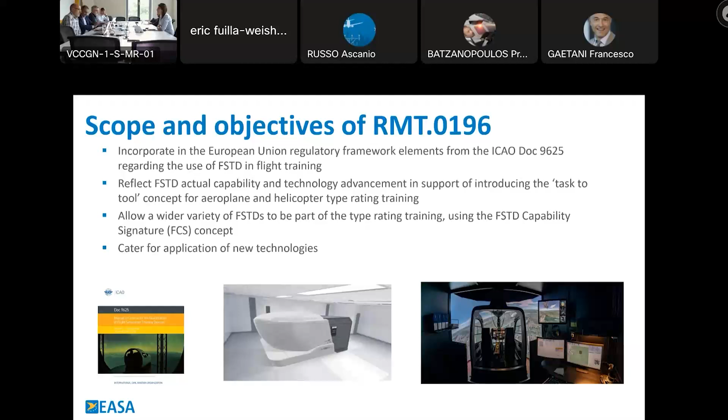Thank you, Francesco. As Francesco said, this task is really an omnicomprehensive task, and is not only looking at the FSTD capability, it's also looking at what the benefits are in pilot training using the FCS concept and framework. To do that, we had to thoroughly review the type rating training course, which is the very first training that the FCS concept will cover, and also see how much we can use FSTDs other than FFS. It has been a very long journey, and we had to review also the qualification of FSTDs with the new CS-FSTD concept that the colleagues will explain very soon. And then we had also to amend the authority as well as the organisational requirements, introducing also tips on how to move forward in that direction.

As we said, today the focus is on the CS-FSTD, and one of the differences that you will spot immediately is that the new CS-FSTD will cover both aircraft categories, fixed wing and rotary wing. Today we have a CS dedicated to aeroplanes and a CS dedicated to helicopters. Tomorrow we will have one single CS with one single concept. To better explain this, I will give the floor immediately to our colleagues, Colin and Eric, please.

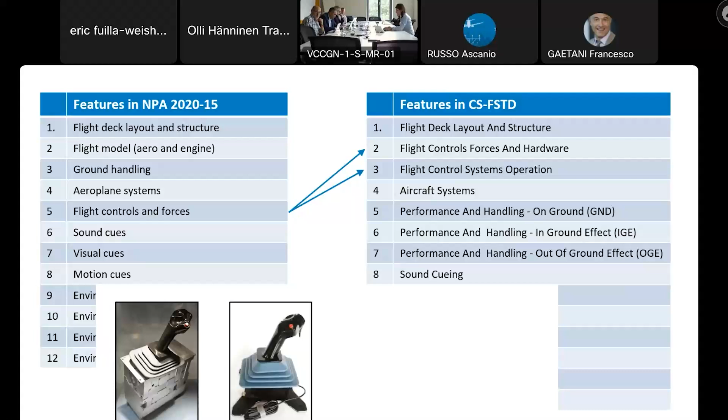Feature number 2 is all about the primary flight control forces and hardware. Please consider a fly-by-wire aircraft such as an Airbus. On the highest, the specific level, the used hardware could be, for example, a genuine Airbus side stick, as you see in the image. For this highest level, the flight controls should look and feel as in the aircraft, and the forces needed to move them should be very realistic. For the representative level, the controls should be very similar to the real aircraft, but the forces do not have to be as accurate. So at this level, the side stick could be simulated, and it could be, for example, something like you see in this photo.

For the generic level, the controls should be characteristic to the simulated aircraft group. Perhaps even a simple controller could be used. And it's also possible not to have any flight control hardware at all. Naturally, the training credits for such a device would be very low.

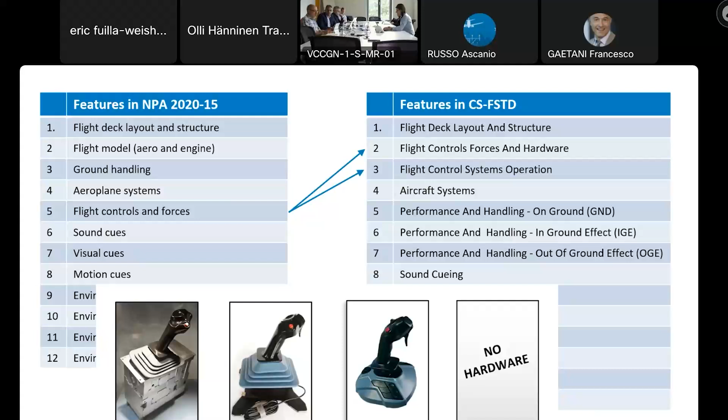Feature number 3 then concerns the flight control system operation, how the flight control system behaves, perhaps what kind of protections it serves, how much the flight control surface deflections move, and so on.

We have also completely reworked the requirements for ground and flight model. In the new CS-FSTD, we talk about flight regimes: ground, in ground effect, and out of ground effect. The ground regime concerns the whole performance and handling, so it combines all the aspects of the ground model and aerodynamics when the aircraft is on the ground. For example, when taxiing, during takeoff, ground run, etc.

And the flight model requirements have been divided into 3 different features. There are reasons to do all of this. First, if you have only one feature for the flight model, as in the NPA, then your flight model covers all the flight phases. It means that you can't get the best level for this feature unless you simulate and validate also takeoffs and landings, but that is very difficult and expensive.

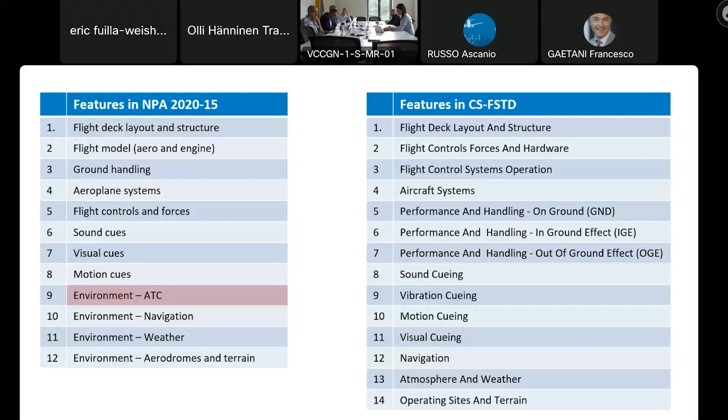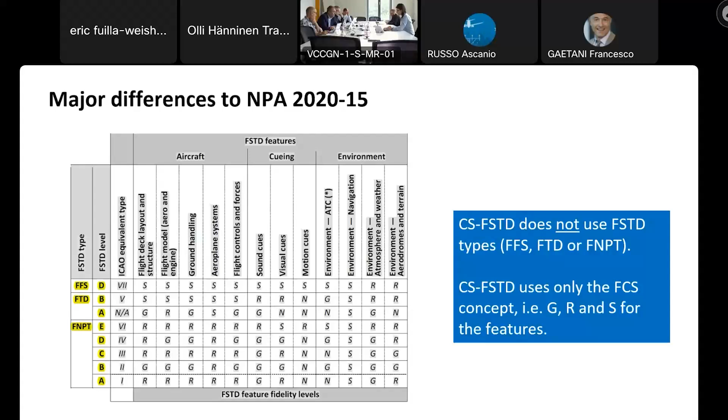Bear in mind that this CS-FSTD will be applicable only to new devices. All the existing devices are remaining in the existing framework. So this is an important change compared to what we are used to and compared to what was in the NPA. Next slide, please, Olli.

There is also an important change that we have made. It is that the fidelity levels for each and every feature now range from generic, representative to specific. We provide a description and we provide requirements for all the fidelity levels, which was not the case in the NPA, which was not the case in DOC 9625. So all the features had their fidelity levels that range from N, G, R, and S. And we think that this makes the whole concept more homogeneous, and there is a clear understanding of the fidelity level and its meaning.

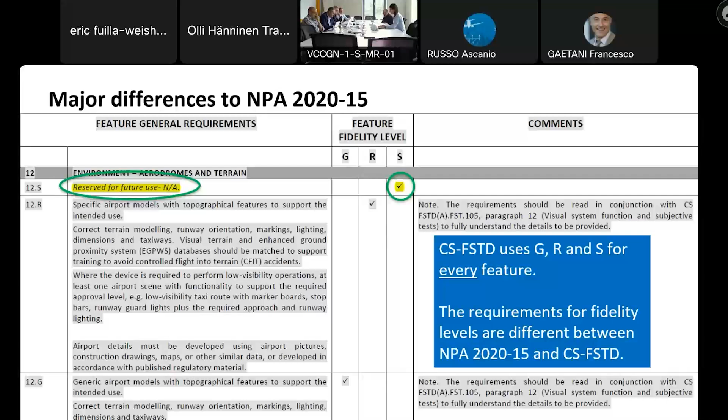There is something important to notice concerning the generic fidelity level. Compared to what is in DOC 9625 and compared to what is in the NPA, the generic fidelity level is slightly higher. It is no longer a simplified simulation. It is no longer a basic simulation. Generic now means it is characteristic of an aircraft class or group. So this is to bear in mind also.

And to make a very simple comparison between the old world and the new world, we can say that if we have all the features at specific level, this is today's FFS level D, roughly. There is no major change. And in fact, if you have a deep analysis of the requirements that we have put in the new CS, you will see that we do not go higher than what you already know for the FFS level D. This is today's limit on the top end.

And if you have a look at what generic means compared to the existing framework, we could say that roughly generic means something that you use in an FNPT.

So this is to give you an explanation about what we understand now with fidelity level. We can say that also the fidelity level for generic is slightly higher than FNPTs because we have seen that in the existing ecosystem of simulators, what is proposed by the industry is higher than the bar that is set by the existing requirements. So we consider that in order to fulfill training needs, we have to align to this and to make generic higher than what was in the previous NPA and Doc 9625.

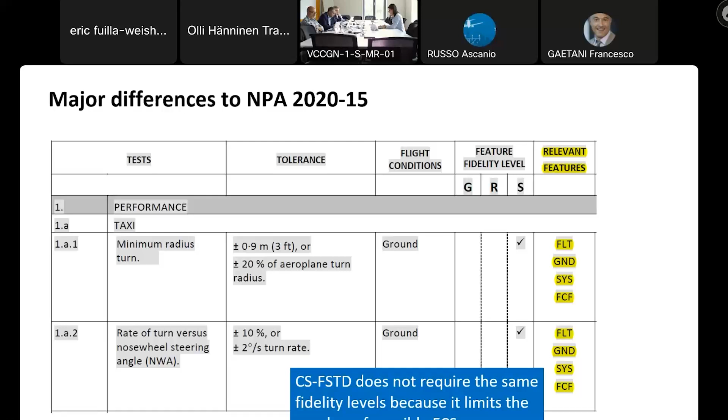As you see, the system presented in the NPA needed a change, and we wanted to have the greatest possible flexibility. So we have rebuilt the whole logic of how the applicable objective tests are selected, and you will see a separate page about that a bit later.

So now let's speak about the change in the scope of the features and the definition of the requirements. In fact, when we took a deep analysis of the content of the document and the comments that we received, we soon realized that there were a few places where there was a kind of overlap between the definition of the requirements and the feature to which they applied. This is just an example.

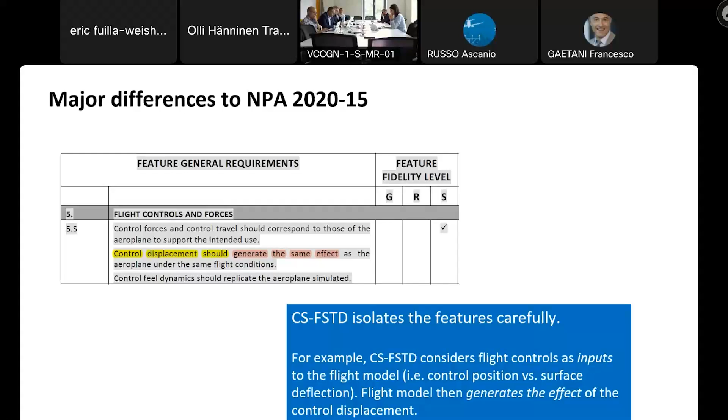And as was mentioned earlier, the airplane and helicopter requirements have been in two different documents. And traditionally, the airplane document has always been updated first, and the helicopter requirements perhaps only some years later. So a decision was made to merge the airplane and rotorcraft requirements into one single CS-FSTD. The layout of the document has been carefully considered so that it would be readable and that the reader would understand what is applicable to airplanes and rotorcraft.

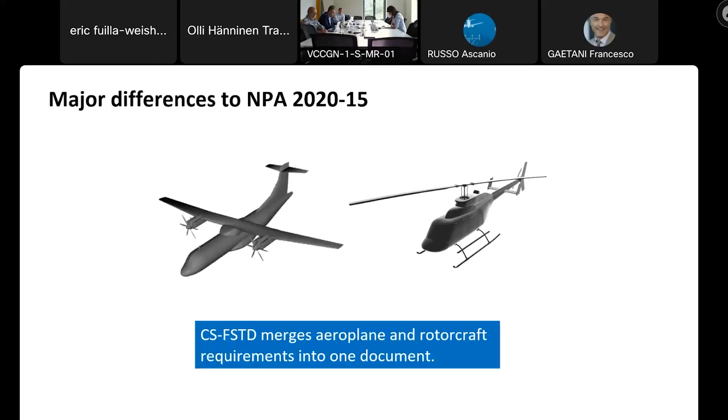And now I'm going to give very basic information, but I think it's almost the most important. In order to guide you in the reading of the document, you have to consider that it's really different from the existing CS-FSTD(A), the existing CS-FSTD(H). It is very different also from Doc 9625. It looks like what you have in the NPA, and we have developed this concept even more. We have a clear split between subparts. There are 5 subparts, and we will describe them in a few minutes.

And each subpart is based on tables and a clear split between requirements, and these requirements are covered by CS, and also covered by guidance material. And we have tried to illustrate all the requirements as much as possible with examples and guidance. And one of our main goals is to have requirements that are indeed requirements and that are not a mix between requirements and guidance. So we have tried to make a right split between the requirement and its guidance.

So now we are going to have a look at the subparts of the document. So I'm going to share my screen. Please bear with me a few seconds.

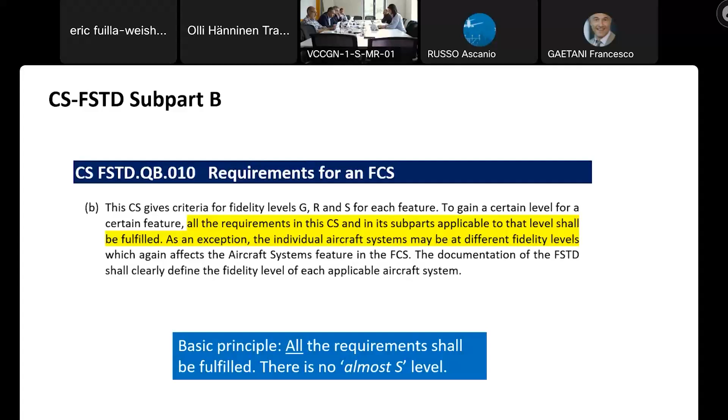The first important principle that I want to highlight is here. The principle is that you have to comply with all the requirements to gain a certain fidelity level. So it means that we don't have an almost level S or a little higher than representative level. It's strictly one of the 4 levels, N, G, R, or S. So you are either at the level none, generic, representative, or specific. There's nothing in between these. So it's an important principle to be included to avoid any wrong interpretations of the requirements.

We said that we have isolated the features. Yes, we have isolated them, the requirements are not overlapping with other features. Still, we can't consider the features in full isolation. The complete training device should have an FCS and levels that make sense. For example, it would be just silly trying to build a device with the specific level of flight model, but the lowest level of flight controls. Actually, also the training requirements kind of mitigate this problem because it would be indeed silly to have such a combination.

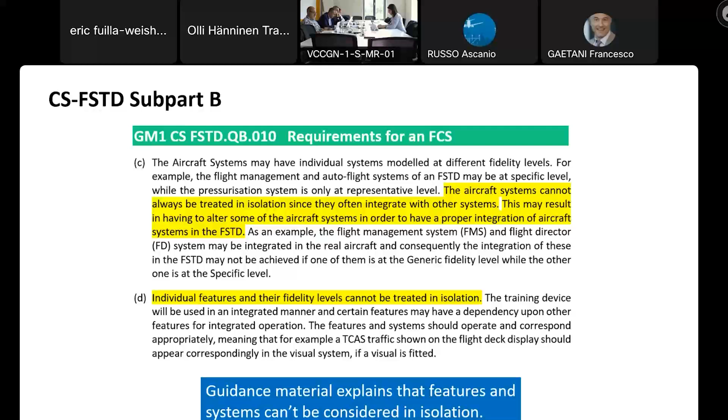As you see here, this framework allows that the aircraft systems may be at different levels. We do this to enable all sorts of part task trainers. You don't need all the aircraft systems. If you are interested in giving training only with some aircraft systems, still, also these systems can't be considered in full isolation because often the aircraft systems integrate with each other. If the device has the aircraft systems at different levels, then the documentation of the device must declare this, and also the training requirements tell you what systems are necessary for the training tasks that you are planning to do.

In the current requirements, the statements of compliance are required only for some topics. Now we are introducing a new concept. We require a statement of justification for all the general requirements. We are deliberately using the word justification. The reason is in the semantics. For the current statement of compliance, you can basically just say that, yes, we do comply. But the statement of justification means that you should give more information to tell how you are fulfilling the requirement.

We understand that these statements will result in more work, but it will serve as an audit trail. It will close the loop. It will create a documentation that tells if and how something is simulated. This tries to answer a very common problem, because it is too often that a device is qualified and only a few years later it is noted that something does not work in the FSTD, and nobody is able to tell if the thing was ever even simulated in the first place. So the statement of justification is given to all the requirements so that you can always refer to them, seeing if and how something is simulated.

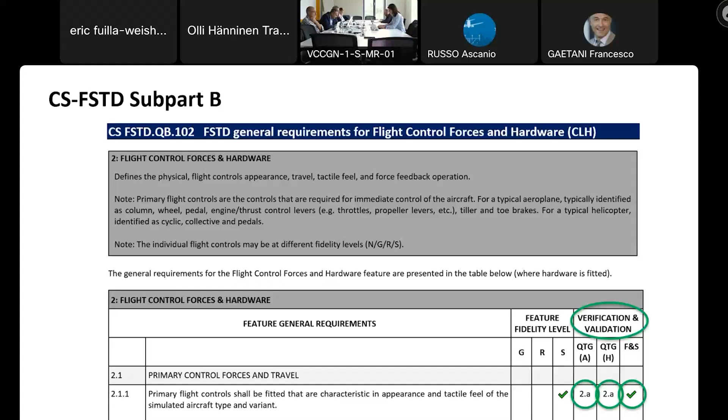We acknowledge that the general requirements are still long and detailed. Therefore, we have summarized them also in easily understandable and very short descriptions for each feature. These words are written to be meaningful, especially to the users of the device, again, meaning the pilots and instructors. They have to understand what each feature and different level means. This is an effective way of sharing that information.

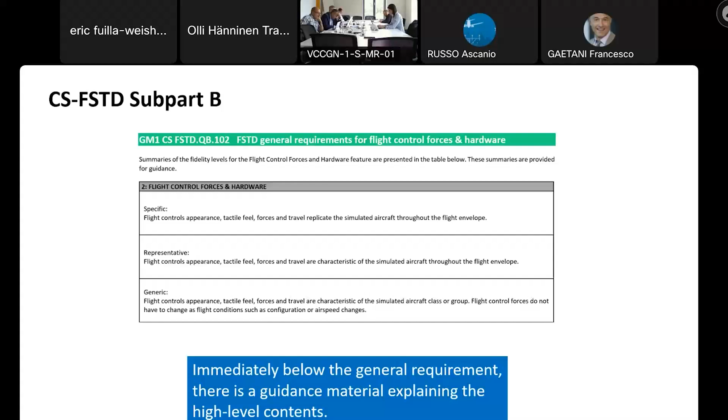We are adding this kind of information as guidance immediately below the general requirements. The same guidance is also added to the training requirements, so that the pilots read more than the CS-FSTD. As you see, we acknowledge that this change is huge, and we are using guidance material in helping all the stakeholders to understand what each requirement and process really means. So this ends the introduction to subpart Bravo. Eric, back to you.

So I will speak now about subpart Charlie. Subpart Charlie is new compared to what was presented in the NPA 2020-15 because we received several comments requiring more explanations on the sources of data that can be used depending on the fidelity level. In fact, we decided to create a brand new subpart. We call it engineering justification.

And indeed, what we speak about is what is known currently as the engineering report, and also the validation data roadmap. And if we are used to the validation data roadmap on higher end devices today and to the engineering report on FNPTs, for instance, from now on with the new CS-FSTD framework, there will be a requirement for both documents, whatever the FCS. There will be an engineering report even at specific fidelity level.

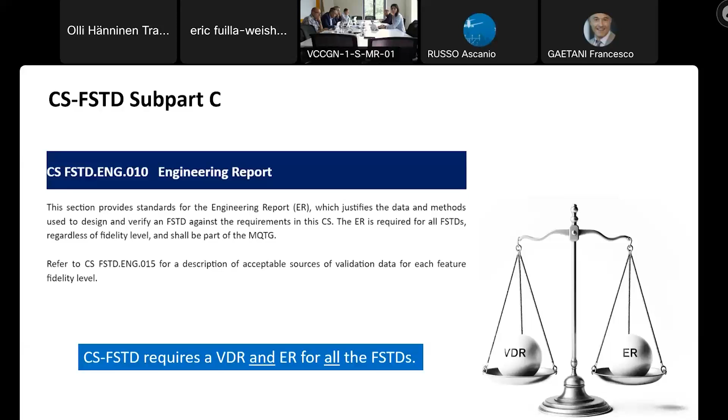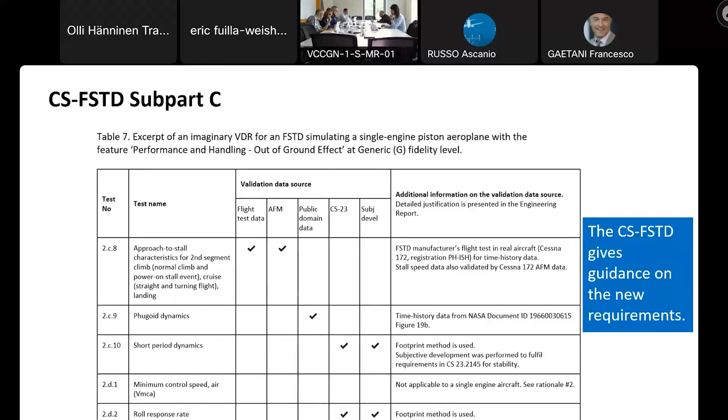I will stop sharing. Thank you, Eric.

And subpart delta gives all the requirements on QTG tests. I will brief you on the main aspects that are necessary to be understood on this entity. As you remember from the beginning, we don't require that the features should be at the same level. While this brings flexibility, it also creates a bit more complexity that has to be controlled and understood. The first aspect is highlighted here. This means that you may have the features at different levels.

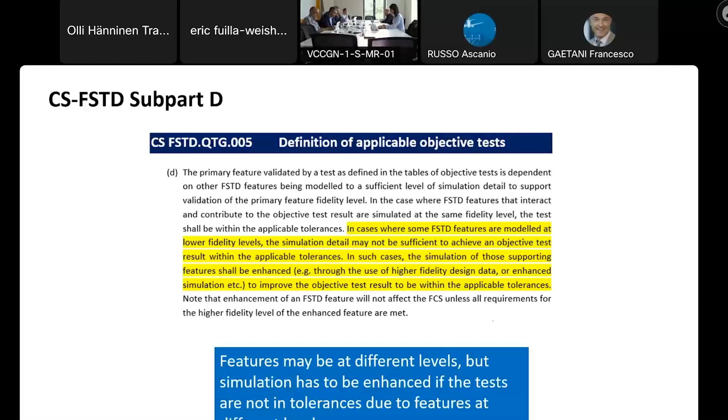When any objective test is applicable to your device, the test shall be within tolerances. We don't give any alleviations to this. For example, if you build your device with only generic level flight control system, but you aim for specific performance and handling, it is a combination that may lead to problems on many objective tests. It is likely that the tests cannot fit within tolerances with such a combination. In such a case, you should just enhance the flight controls simulation as much as is necessary until the tests can be demonstrated to be within the tolerances.

Another important principle is that we are fixing a problem with the objective tests. Today, our regulation gives tolerances on the output, like how the aircraft attitude changes, but the regulations today hardly say any word about the test inputs, how well the flight controls and initial parameters should match the validation data. In this example that you see, it's a good match on the test output. It's nicely within tolerances, but if the input is like this, we should really not approve this test.

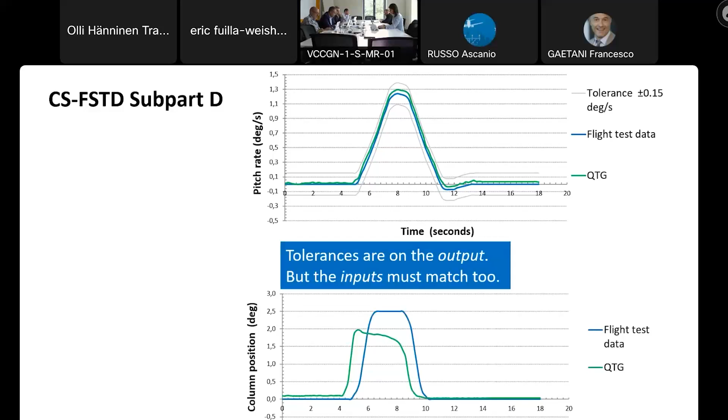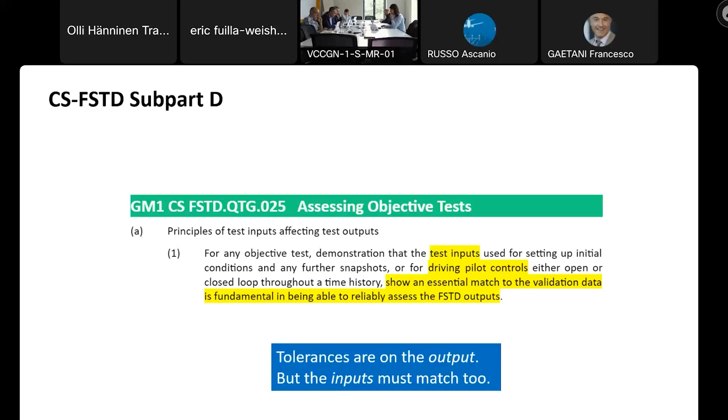As a summary, we need criteria on the test inputs as well, and we have added this into the CS-FSTD. This is part of the new requirements. You see that it uses the words essential match. It means basically that the FSTD result is the same as in the validation data. Please stand by. There will be a further page on the essential match coming soon.

Some sections are common for airplanes and rotorcraft. For example, some visual tests are such. But most of the tests are different between airplanes and helicopters, so we use the letters A and H in the titles, and we also use the complete words for airplane and rotorcraft in the titles as well.

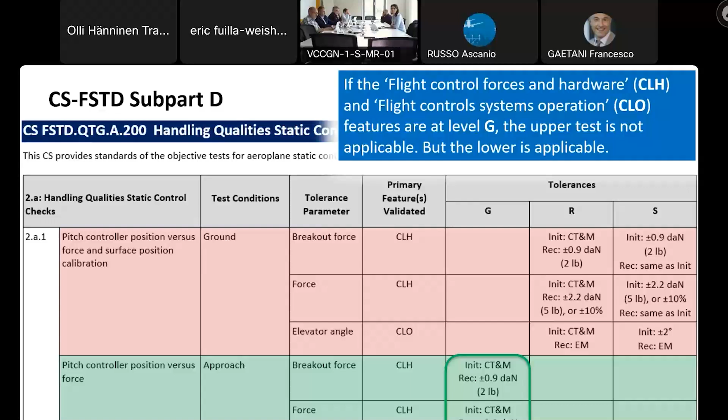This is a good example. We are still reading the same test for a sweep test. For the representative level, for initial qualification, meaning the approval of the master QTG, the elevator angle tolerances are CT and M, meaning correct trend and magnitude. So there should be appropriate validation data to support this test, and the FSTD should correspond to that within correct

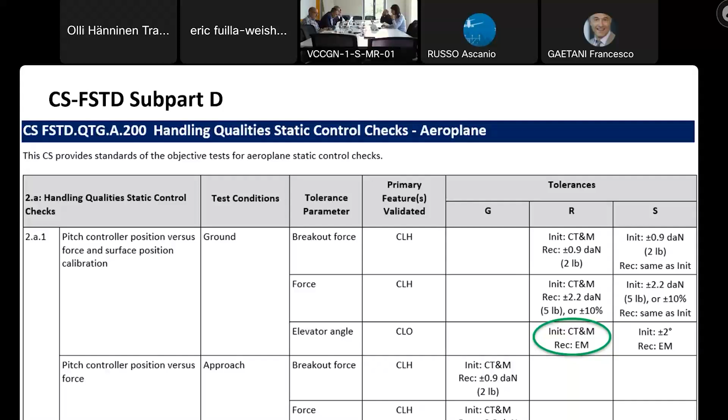trend and magnitude. For the recurrent tests, the annual tests that you perform, the FSTD should show essential match to the master QTG. We abbreviate the essential match as EM, Echo Mike. The elevator angle is calculated by the software based on the control position, so it should basically not change at all, even as time passes by. So an essential match is expected. We give criteria and guidance on the essential match.

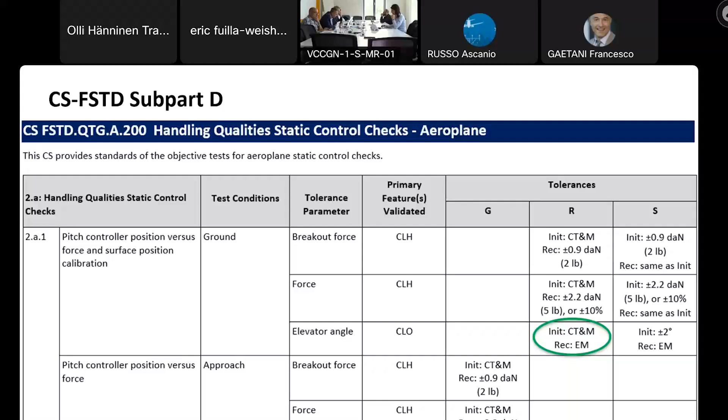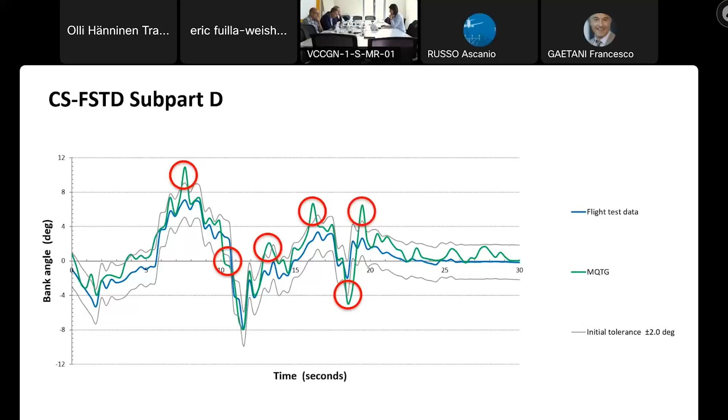But the same question about these highlighted points still arises for every single recurrent test. The test engineer and the evaluator waste their time when they have to also open the master QTG binder to compare the recurrent to the master. For this reason, the CS-FSTD requires that the recurrent QTG test should also show the master QTG result. Many device manufacturers do that already today and have done that for many, many years, but we want to make this a standard for all the devices.

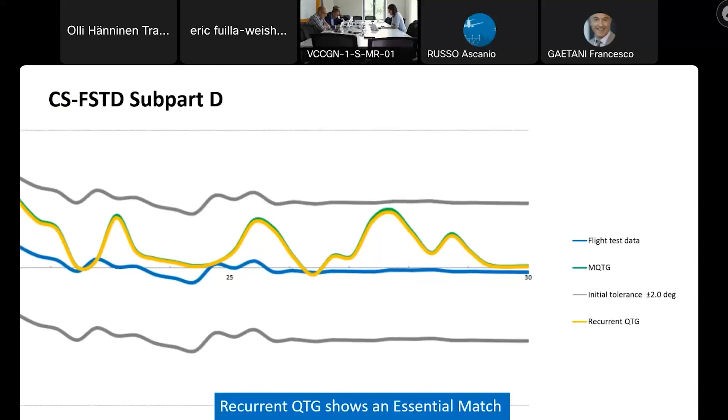In this example, you see what the recurrent QTG graph could look like. For the recurrent test, we are primarily comparing the recurrent to the master. Still, the validation data should be there also to support the analysis. We can see that the recurrent and master results are basically overlapping, but let's zoom in a little closer. Yes, the recurrent and the master QTG are overlapping almost pixel by pixel. This is an essential match.

Now, we don't need to interpret the results or use engineering judgment. We are just comparing if the device is able to repeat what was originally qualified. Most of the new devices today are perfectly capable of showing essential match. This principle is not a new thing. We are just implementing that as official language and as the primary method of checking recurrent test results.

I still return to the QTG table in the CS-FSTD. This is another example of the tolerances. These tolerances apply to the control forces. That depends both on the software and also on the hardware. And hardware naturally wears out over time, so we cannot require an essential match for the recurrent tests. So we say that for the recurrent tests, the same tolerances apply as for the initial qualification.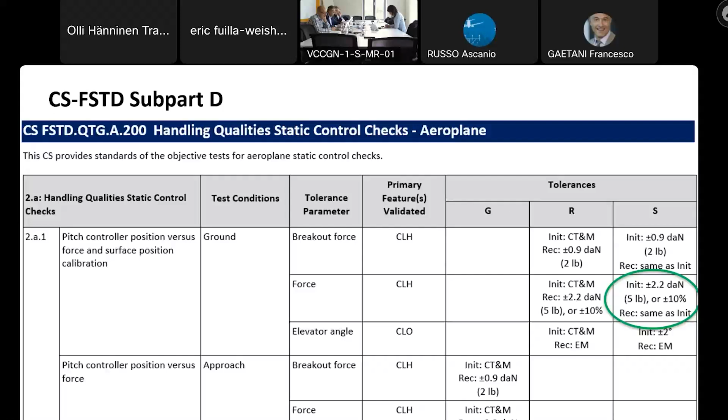For the S level, the tests and tolerances are pretty much the same as today for a full flight simulator level D, as was mentioned. Levels R and G are quite close to today's FTD and FNPT devices, but they have been reconsidered and modified, and the test requirements are based on the training requirements as well.

As I mentioned, below the test requirements table, we give all the test requirements and information. First, we have this kind of a table giving information or requirements for all the tests in the section in question, followed by another table where we give detailed test requirements for each individual test. I hope that this gives you an understanding of how the QTG tests or objective tests are selected and how the tolerances are interpreted. The CS-FSTD naturally gives textual requirements and guidance and more information on all of this.

So now I will speak about the functions and subjective test, Subpart E. And as in the rest of the document in the CS-FSTD, we try to keep the information structured so that you don't have to navigate from one page to 200 pages later, etc. So we try to keep the information at the right place and at the right level.

For the functions and subjective test, it is still the same philosophy as you already know, but we emphasize that, in fact, with the flexibility that the FCS concept enables, there must be greater consideration taken by the FSTD organization and the people who design the functions and subjective test program.

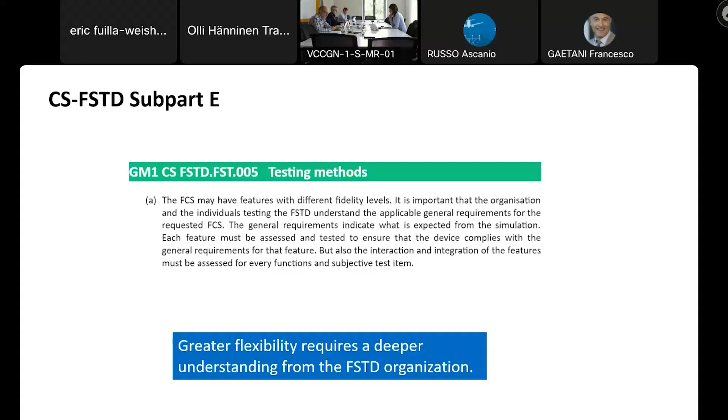It is something that has to be adjusted to the FCS, adjusted to the capabilities of the device. So it's what comes with the greater flexibility. And in fact, there needs to be a good assessment of the device when designing the functions and subjective. And in order to help in this process, we provide information on how to do it.

And there is a process that is described in the CS-FSTD. So there is a typical, what you see on the screen, the FST 010. It is explaining exactly this process of how to design the FNST program. And we also provide guidance afterwards, but clearly right from the requirement level, the CS, you have explanations about, in some cases, you will have to remove some tests that are not applicable.

You have to expand the list, so to add tests, and you have to adjust the list of tests depending on the operation of your aircraft systems. So everything is listed in a structured way to explain all that has to be covered in the FNST. And as it is something that is, I think, better explained than in the past, we also consider that it's very important to provide guidance on this.

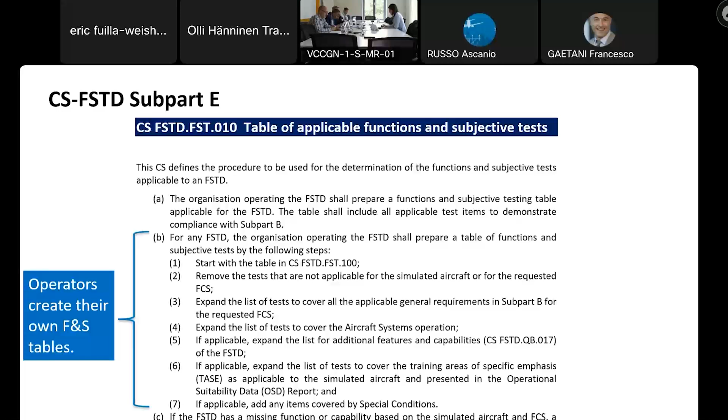And we explain in real cases scenario what should be done. So very basic examples sometimes, but for instance, if your device simulates a single engine aircraft, you have to adjust your function subjective test, and some items that are applicable only to multi-engine, you remove them. And it is your own responsibility as a user to have this list tailored to your simulated aircraft and to your FCS. This is a very important topic.

And now I will give back the mic to Olli to cover the end of the presentation. So please bear with me. Thanks, Eric. So should we jump to the last slides? Yes, please go ahead. I have to stop sharing. Yes. So, yes, now it's flowing, and a few more slides.

So now we have covered the structure and main principles of the new CS-FSTD. But I wish to highlight one more aspect. It is about the extended reality, meaning virtual reality, augmented reality, and so on. This is a hot potato, as we all know. We need detailed requirements for that, but we don't have them yet. However, EASA has already qualified some devices under the special conditions arrangement.

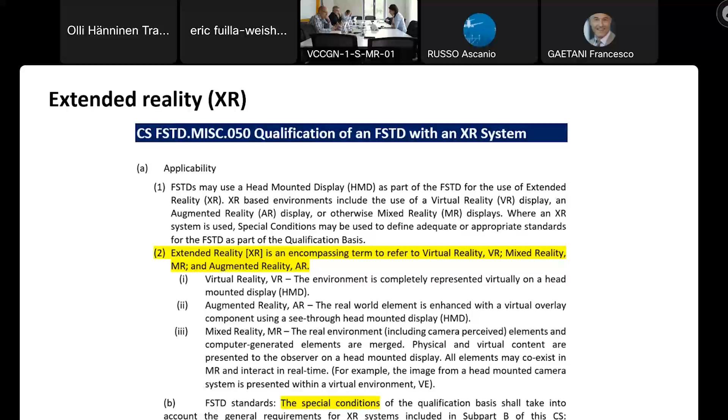EASA is planning to continue this work with the extended reality matters topics, so it seems that EASA and ICAO are also doing parallel work, and in the next revisions we would see really detailed technical requirements, while today we only have more like a process and only the top level requirements in this CS-FSTD. So everything that already exists in the mentioned EASA guidelines has been incorporated into the requirements and tables themselves, as you see in this sample.

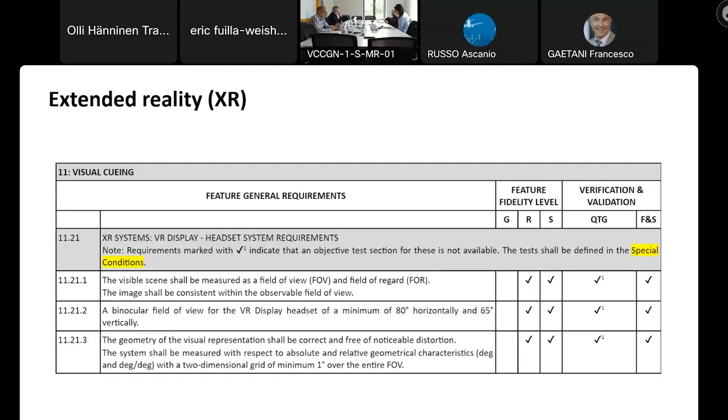This sample lists the existing policies for extended reality, but again, it still only acknowledges that special conditions need to be followed, and the requirements for the special conditions can be found in Subpart B. Now you should be able to understand the main aspects of the CS-FSTD. The CS-FSTD is not absolutely perfect yet. There will be a focused consultation of the CS-FSTD in the future.